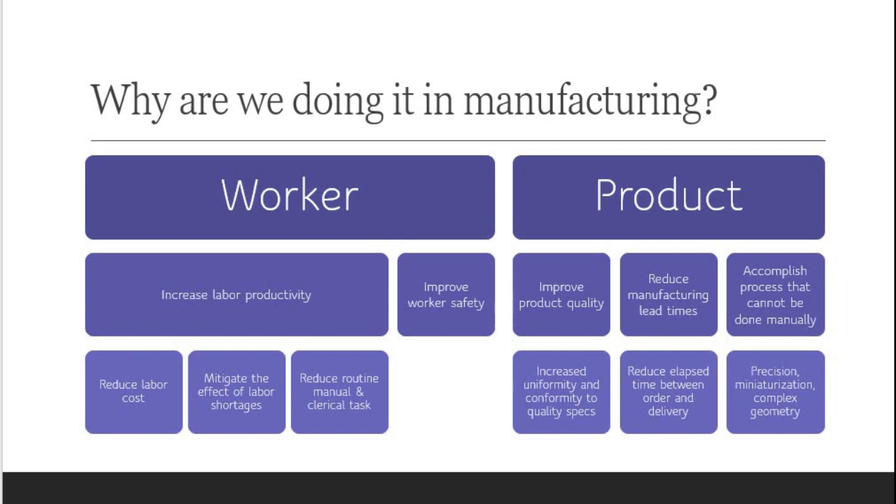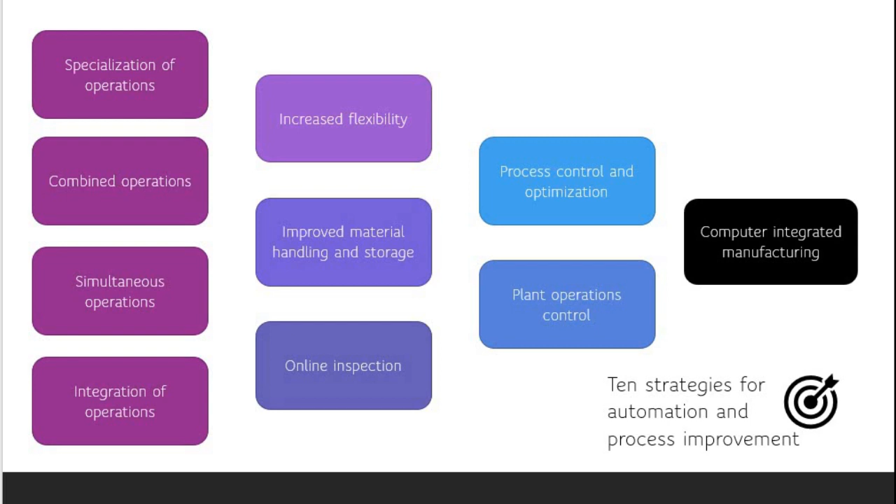In the previous lecture we delved into the details of implementing automation in manufacturing. We saw why we need automation in terms of the worker and the product, the strategies of process improvement and automation, and how to implement them. We learned there are 3 types of automation, and the order goes from fixed to advanced flexible automation.

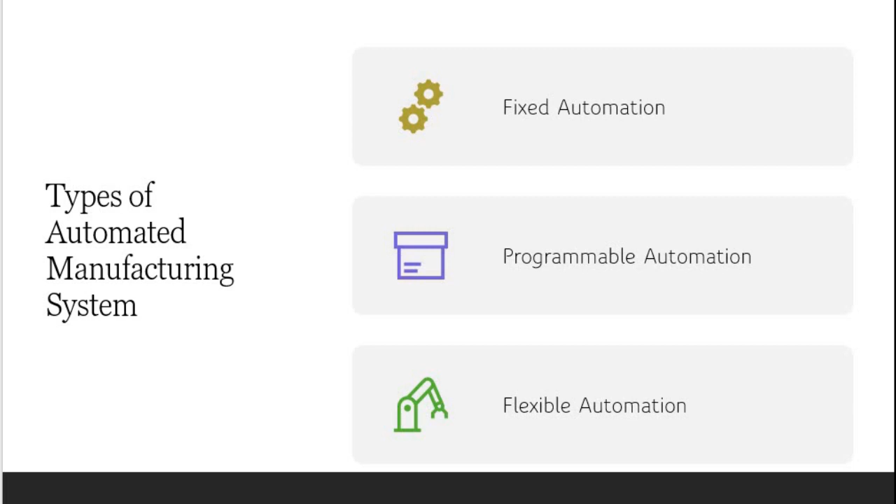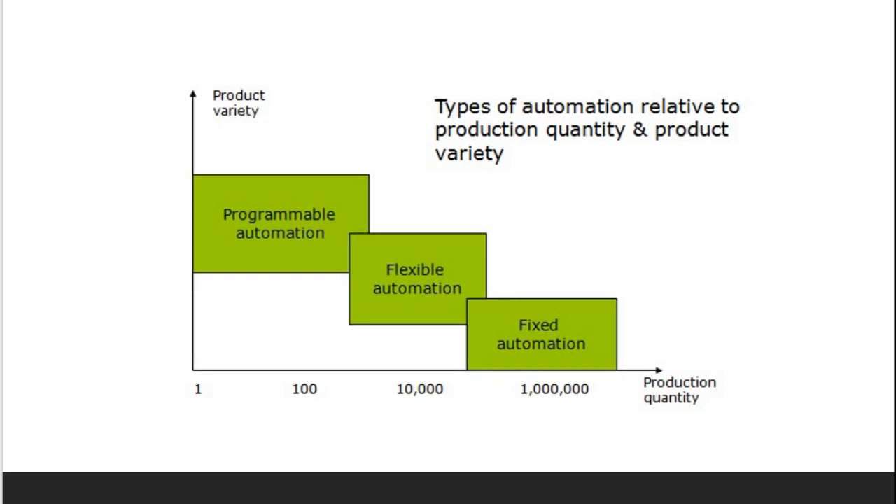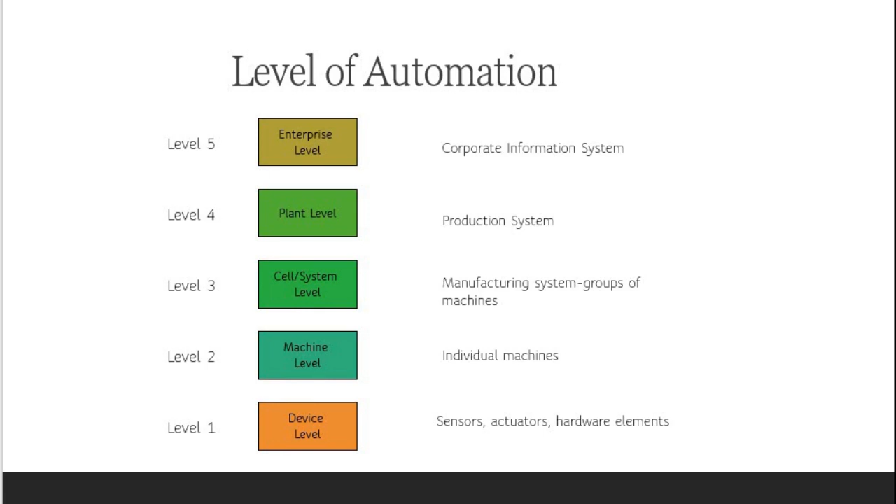We also saw the influence of production quantity and variety on the type of automation that can take place, and learned that the level of automation is not limited to the process level only, but can be implemented up to the enterprise level. We saw how this can be done through computer integrated manufacturing, which is the essence of flexible automation.

Therefore, in this lecture we will go further into more advanced automation solutions. But what can be more advanced than flexible automation in a manufacturing system? Here comes the term cyber physical system. It is the essence of the 4th industrial revolution in manufacturing.

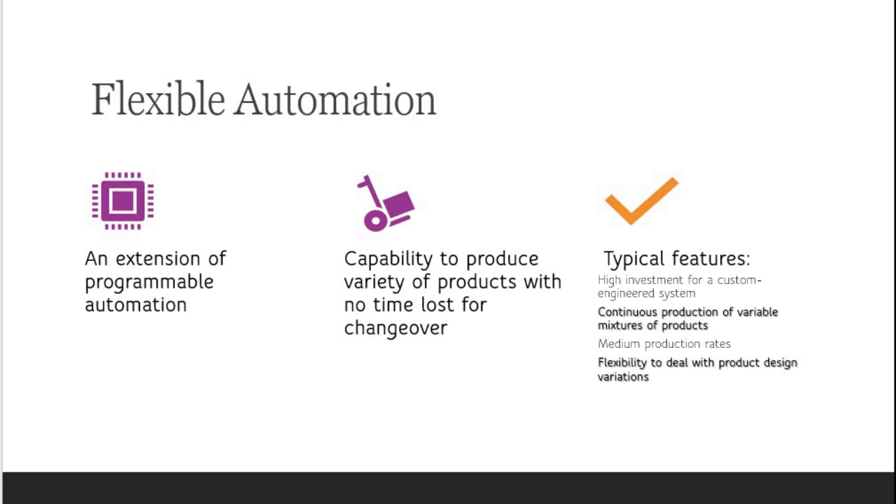So we will go through the challenges for manufacturing in the 4th industrial revolution, what a cyber physical system actually is, and we will see one of the models later on of how it can be implemented in practice. We probably will not have time to see the model today, but I will do it next week.

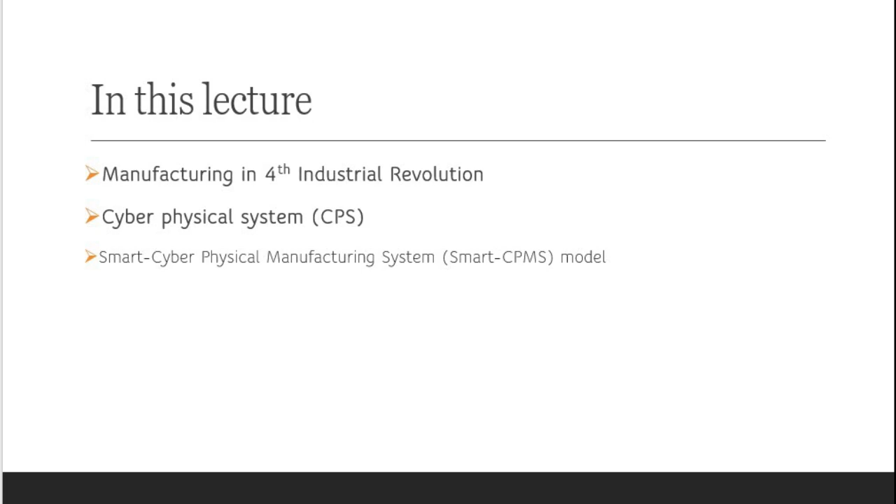In the previous lecture I touched a bit on the Industrial Revolution. The first phase happened from the year 1784, which was mechanical production on the basis of water and steam. The second Industrial Revolution happened at the beginning of the 20th century with the introduction of conveyor belts and mass production. The third revolution was the digital automation of production by means of electronics and information technology systems.

In this 4th revolution, automation becomes ubiquitous, and instead of simply automating production, it evolves into a cyber physical system in which customization can be done on the fly with optimized decision making in place. Production now becomes more productive, flexible, versatile, safer, and collaborative, creating an unprecedented level of value in the entire ecosystem.

Smart factories, which will be at the heart of Industry 4.0, will take on board information and communication technology, an evolution in the supply chain and production line that brings a much higher level of both automation and digitalization. This means machines using self-optimization, self-configuration, and even artificial intelligence to complete complex tasks in order to deliver vastly superior cost efficiencies and better quality of goods or services.

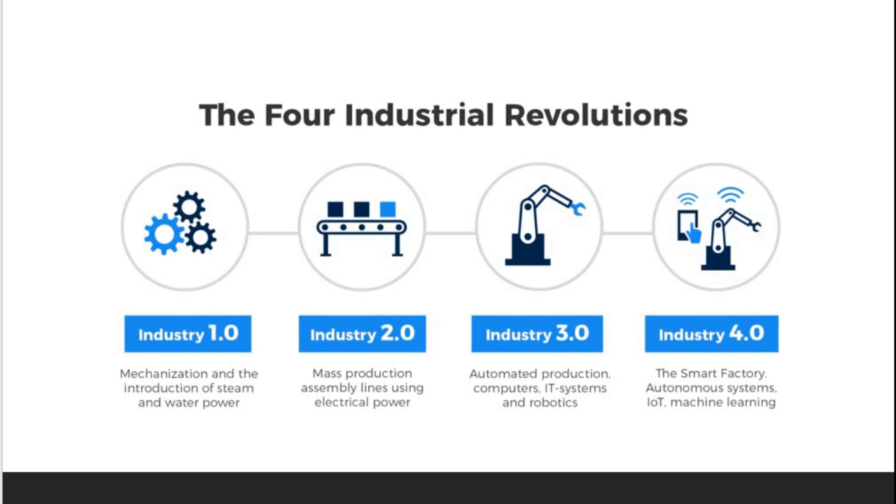From the manufacturing point of view, the 4th revolution shifts the paradigm from using automation to mass-produce goods into mass customizing goods. We learned that ideally we want more flexibility on the manufacturing side through flexible automation systems, but flexible automation is still pre-programmed. Therefore it has difficulty reaching the requirements of flexibility, adaptability, and reliability as exclusive and individualized demand kicks in.

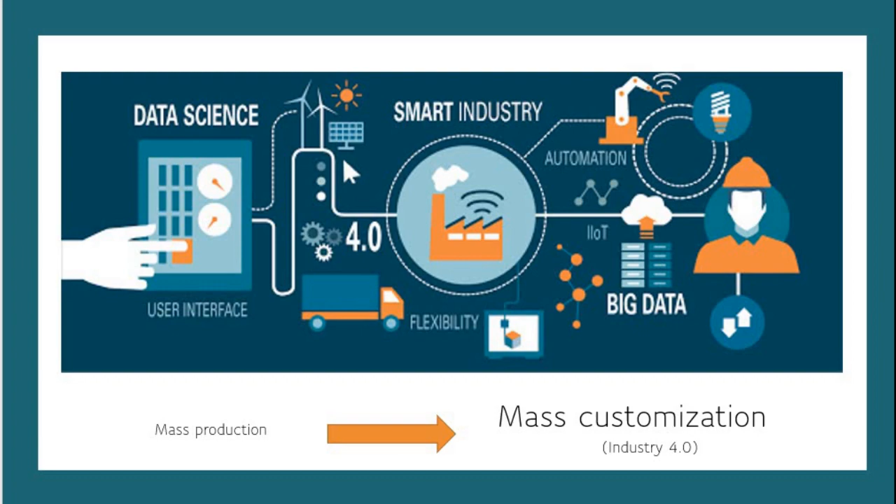So the mass customization we foresee happening means the product itself will have a shorter product cycle, be customized, but with lower price and best quality. The industrial manufacturing life cycle becomes oriented towards increasing individualism of customer requirements.

It emphasizes the idea of consistent digitalization and linking of all productive units in the production system. Therefore, the manufacturing system in this fourth industrial revolution is aimed to be well adapted to manufacturing changes due to mass customization. This trend requires manufacturing systems to have the ability to adapt to fast changes in the manufacturing environment.

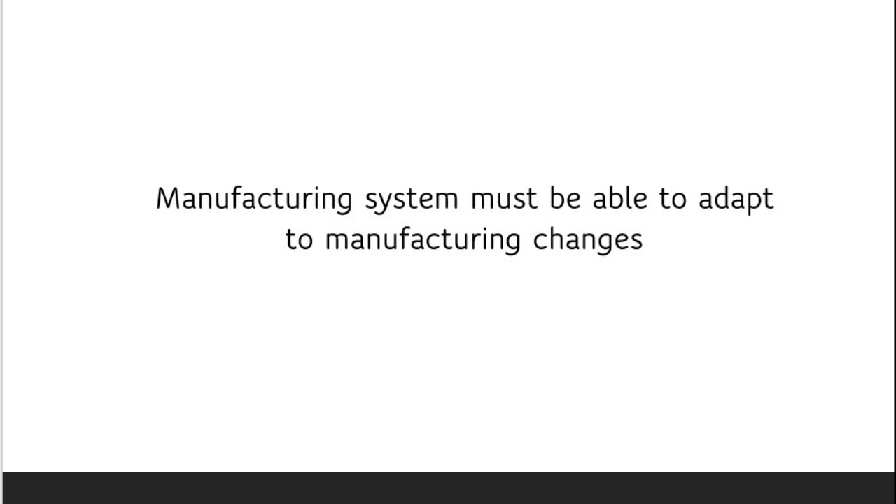To face these challenges, the new trend of manufacturing system development is to apply autonomous behaviors inspired from living systems and nature to have sustainable manufacturing systems. So the manufacturing industry in this era 4.0 is characterized by autonomous systems, meaning systems that make decisions on their own and act accordingly.

So it is a cyber and physical representation and advancement in ICT, such as cloud computing, Internet of Things, Internet of Services, agent technology, cognitive technology, big data, data mining, and artificial intelligence.

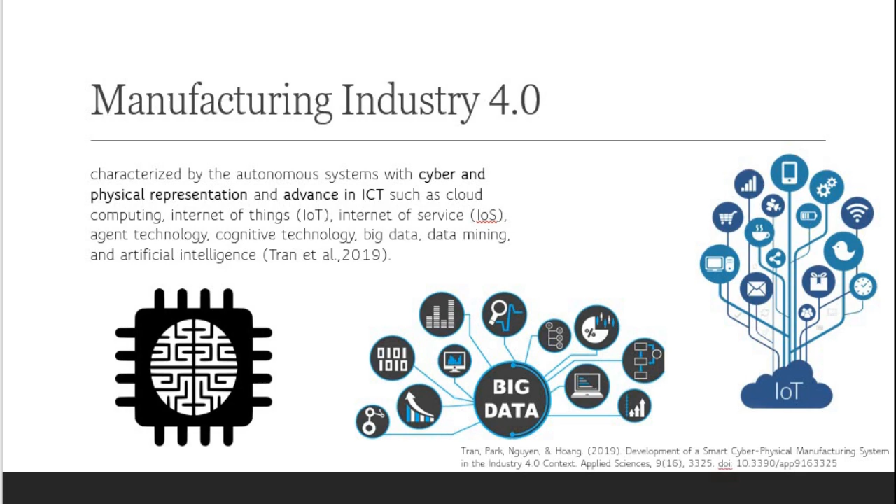In other words, Industry 4.0 is the new era where the Internet of Things alongside cyber-physical systems interconnect in a way where the combination of software, sensor, processor, and communication technology plays a huge role in making things. So it is quite prudent to say that the term cyber-physical system is simply used to describe a system that connects the physical world with the digital.

It can be considered a confluence of embedded systems, real-time systems, distributed sensor systems and controls, which focus on complex interdependencies and integration between cyberspace and the physical world, and is composed of tightly integrated computation, communication, control, and physical elements. This definition of cyber-physical systems includes a lot of jargon.

Basically the elements inside the cyber-physical system are about making sure the system itself is smart enough to make decisions on its own, and then have the ability to predict what it can do, what it cannot do, and the ability to communicate the decision making as well as the actions during the process.

So a CPS itself is autonomous and has intelligent behaviors. For example, the use of IoT—IoT involves devices which are connected and smart enough to communicate with each other.

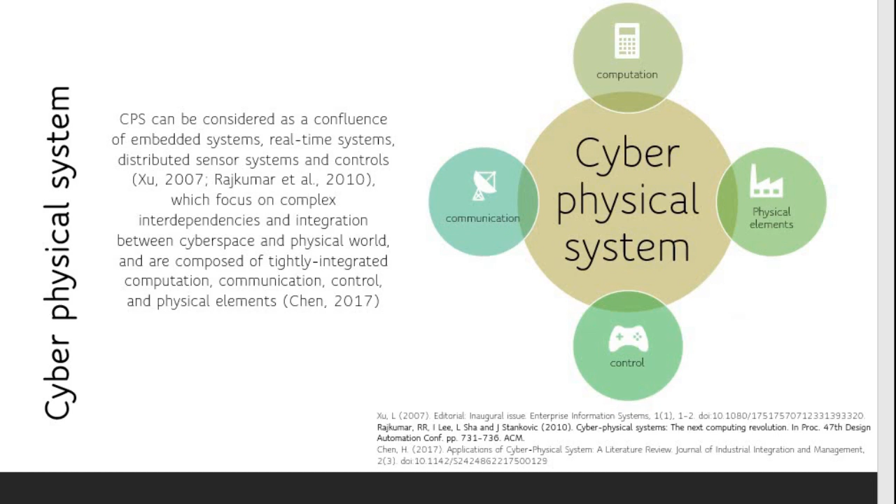And inside this comes cognitive agent technology, which enables the realization of autonomous behaviors such as perception and action, and intelligent behaviors such as learning and reasoning, to make decisions that are carried out using artificial intelligence.